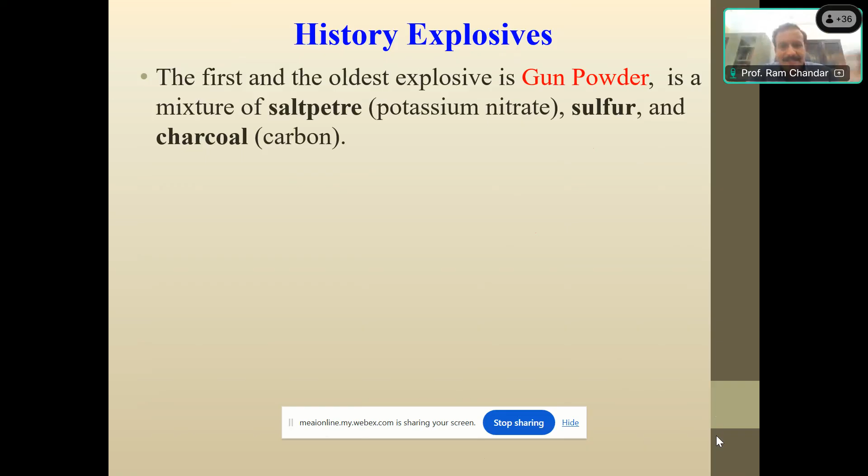Though there are so many other alternatives that have come, their productivity is very low and the cost is very high. When blasting started, as you know, the oldest explosive is gunpowder, for which there is no clear historical evidence of who invented it. Some say Chinese invented it, others say Arabians invented it.

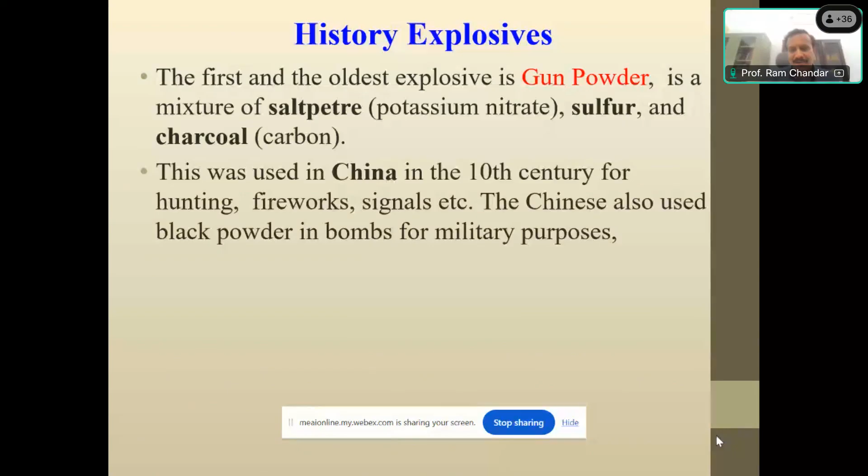But its history is almost 10 to 14 centuries old, though it was actually not invented for blasting. It was basically used in the initial days for hunting purposes. Blasting was used for the first time in the year 1627 in a Hungarian gold mine. So even if you consider the history of blasting in mines, we have roughly around 400 years of history.

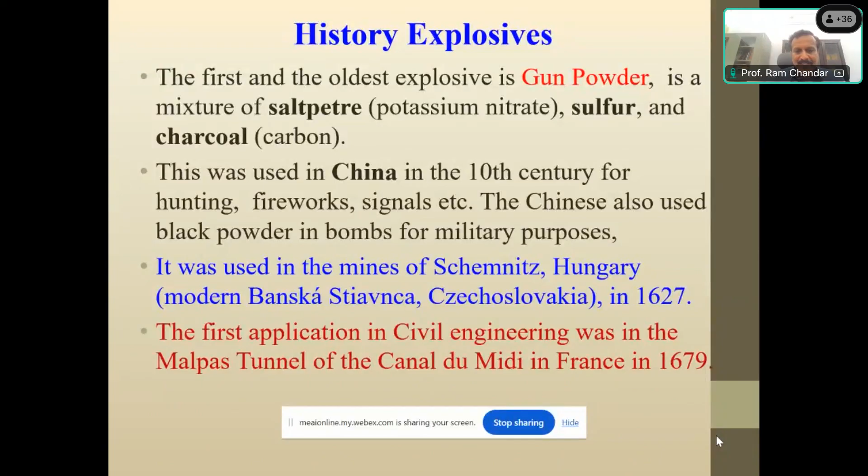And the first time it was used in a civil engineering project was in a tunnel in France in the year 1679. Though blasting is a very vast subject, I am sticking today's lecture mostly to electronic detonators. So once you have an explosive, you should have an initiating device.

Like when you are buying a candle, you must buy a matchstick or a lighter or something to initiate it to get the light, right? Similarly, when you are buying an explosive, you must have an initiating device to safely initiate it. There are historical evidences of so many initiating devices, starting from 1830 to even today, with a lot of technical advancements.

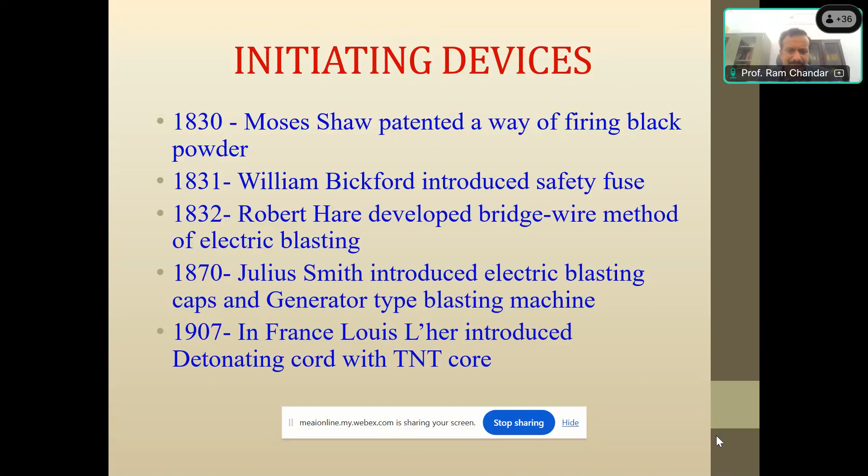In the present generation, over the last 20-30 years, what we have seen is electric detonators, including instantaneous and delay detonators, detonating cord, Nonel-based shock tube, and of late, electronic detonators.

Most of you, those at senior levels, I think you must have started your career in large scale mines using a detonating cord with a cord relay. Those who are in middle management, the younger generation, may be using Nonels. And after a few years, industry will commonly be using electronic detonators.

There were a number of patents on electronic detonators from different countries like Germany, US, Canada, and so on. But you see, though the technology was introduced in '86, we are still not able to use these electronic detonators on a large scale, even after 38 years.

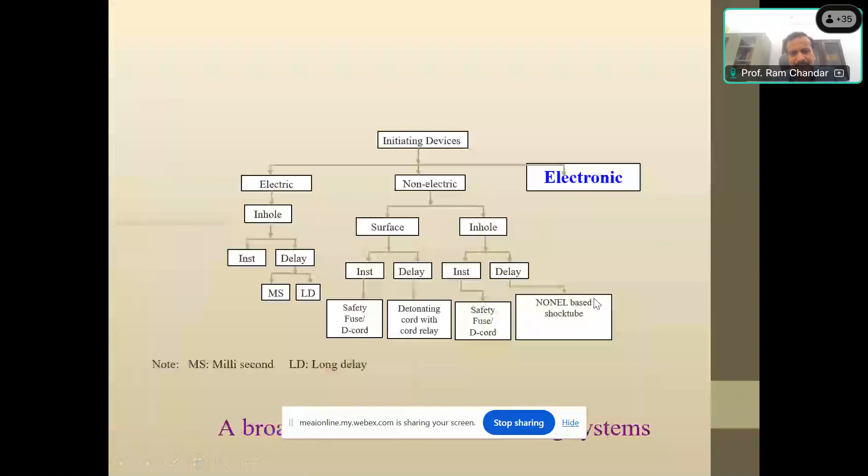So if you broadly classify, if you see any textbook, during your BTech subject in blasting or rock fragmentation engineering, initiation devices, only this chart will be there. The electronic detonator is not there in the old books. Now we have to add electronic detonators also, because olden days we classified into electric and non-electric.

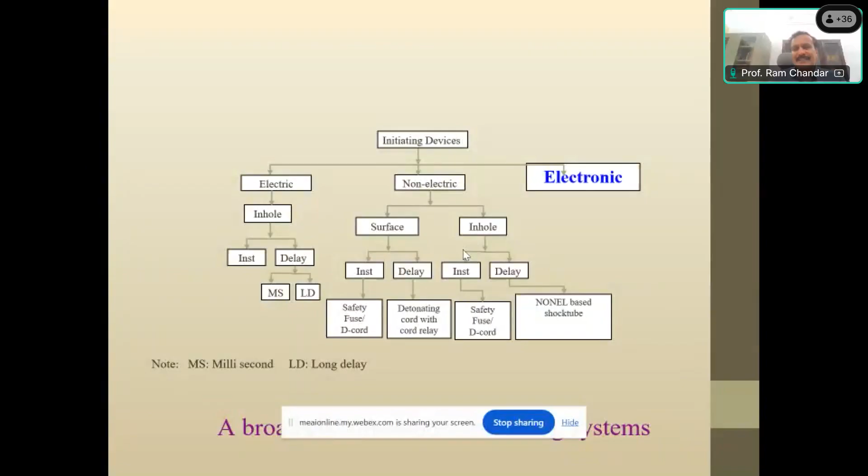It is instantaneous, but there is no point using an electronic detonator as a zero detonator. You have procured it to produce a given delay timing. If you don't give any delay timing, it goes as an instantaneous detonator, it is of no use. But all electronic detonators we are using for delay purposes only. The delay you can fix in the logger.

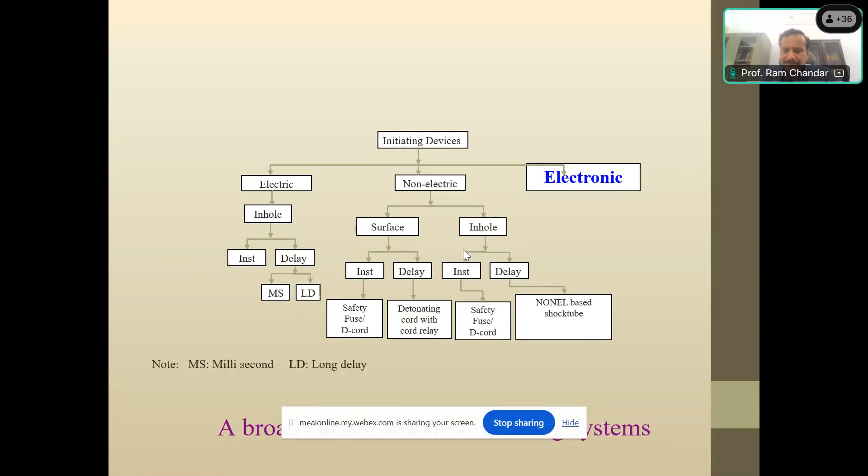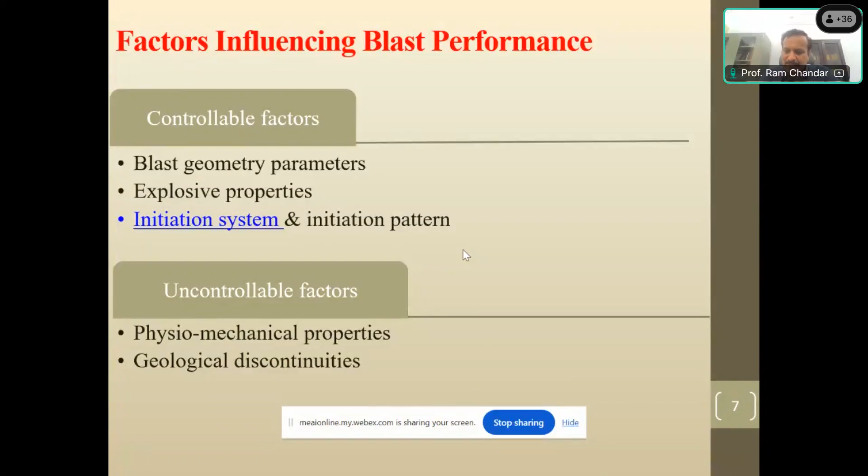Among them, now we'll stick to only the initiation system. Coming to blast geometry and explosive properties, I think other lectures may cover that. I'm not going into that part.

So what is basically the purpose of blasting? As you know, breaking the rock mass into the desired size distribution is the main purpose, with minimum side effects. What we need is fragmentation, suitable to the downstream operations. But the side effects are ground vibration, noise, and fly rock.

In fact, only 18 to 20% of the energy of explosive comes in the form of fragmentation. The remaining 78 to 80% goes in the form of unwanted effects like ground vibration, noise, and fly rock. These side effects are not only wasting our explosive energy, but also causing unwanted problems.

Because nearby villagers come and complain because of high noise levels. Actually, when noise levels are high, there is no correlation - if noise levels are high, that doesn't mean there is damage to the structure. But most of these are called socio-technical complaints. Some of you may be mines managers - nearby villagers will come and shout against the project management or against the blasting, telling that 'I am standing in my field, I could hear the sound, there is a big noise and my house is going to be damaged,' though no cracks have come.

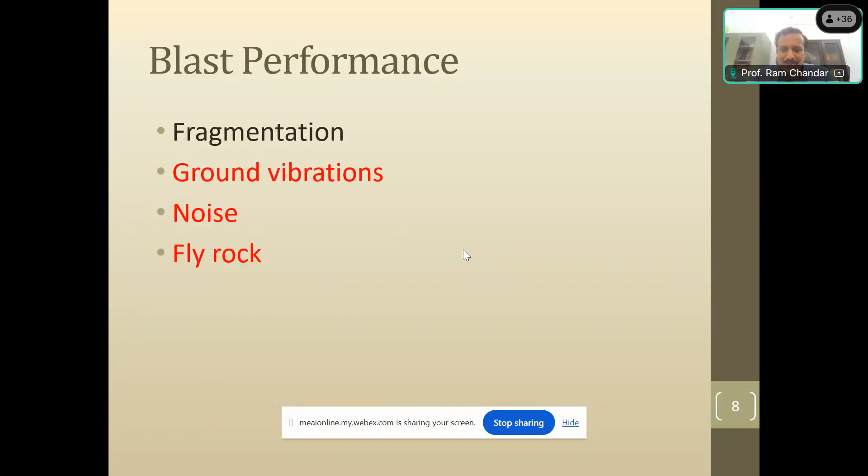But the thing is, you are the owner. If loader performance is not good, or dumper productivity is less, it is within your hands. But especially the side effects are more - the neighboring people come into the picture, into the problem, and sometimes they may halt the project itself.

I started working on the initiation system way back in 2000 when I was a student at Banaras Hindu University doing my MTech. I think I was one of the first students to work on this. My guide, Dr. T.N. Singh, present Director at IIT Patna, told me non-electric initiation systems were being introduced in the Indian market, and I could start my MTech project on that.

In 2001, as a student, my first two publications were made. Later, when I joined NIT Surathkal as a faculty member, I continued my research on initiation systems - these are just a few of the publications I have given. There are a number of publications under my name, especially on initiation systems, which are available free online.

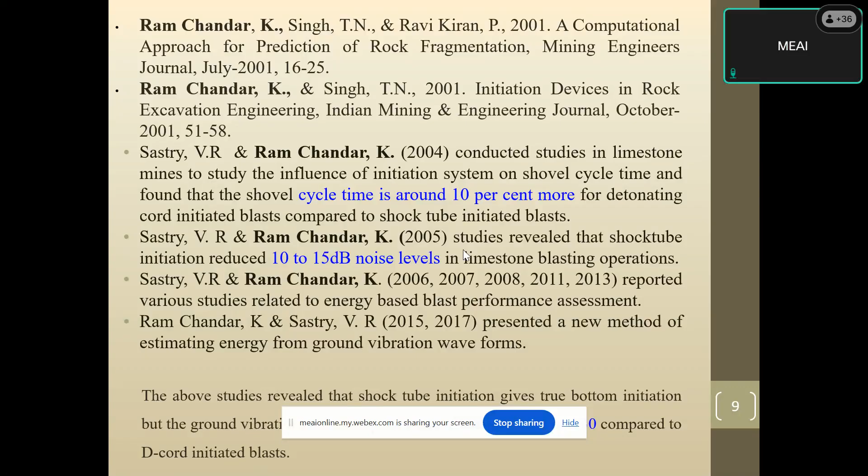We did comparative studies between non-el based shock tube initiation and detonating cord initiation in terms of ground vibration, noise levels, and fragmentation using different methods. There are various studies done by us in limestone, coal, dolomite, and different formations. Other researchers have also studied this in detail.

There is a clear-cut difference - the noise levels are less with non-el initiation system compared to detonating cord, around 10 to 15 decibels. There is a very clear conclusion on this, because there are 10 grams of PETN in the detonating cord, whereas in shock tube only 20 milligrams of PETN is there. PETN is mainly responsible for noise levels - more grammage of PETN leads to higher noise levels.

That's why detonating cord always produces higher noise levels. A reduction of 10 to 15 decibels is a very good indication. Fragmentation is also always better with non-el based shock tube initiation, because of true bottom initiation. The cycle time of the shovel is 10% better than with detonating cord initiation blasts.

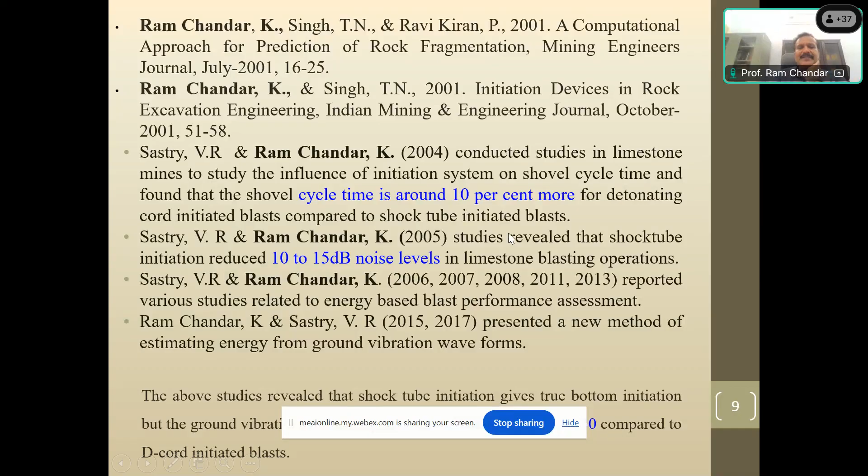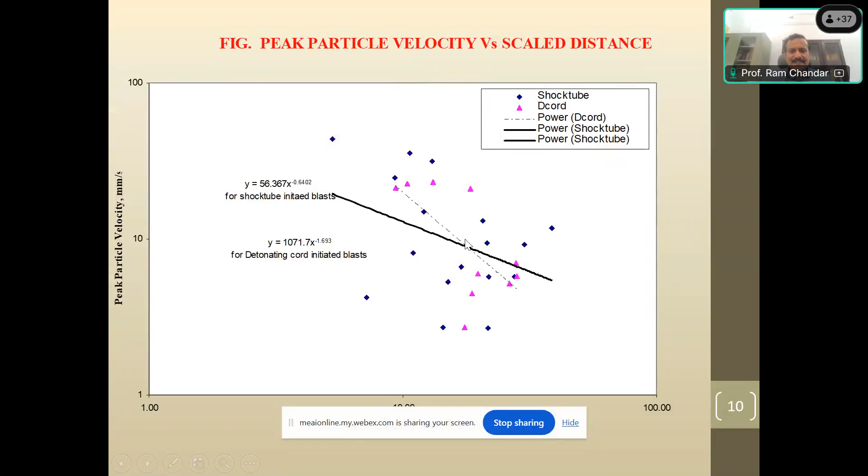But when you compare ground vibrations, there is no clear-cut clarity. Detonating cord gives higher vibration levels only up to a scale distance of around 20. Hope you know what scale distance is - it is distance divided by the square root of maximum charge per delay.

The two parameters are merged into a single parameter called scale distance. This paper was published around 2005 or 2006. At that time, we were not exactly clear why this was happening.

One of the reasons could be that in shock tube initiation, the delay timings used

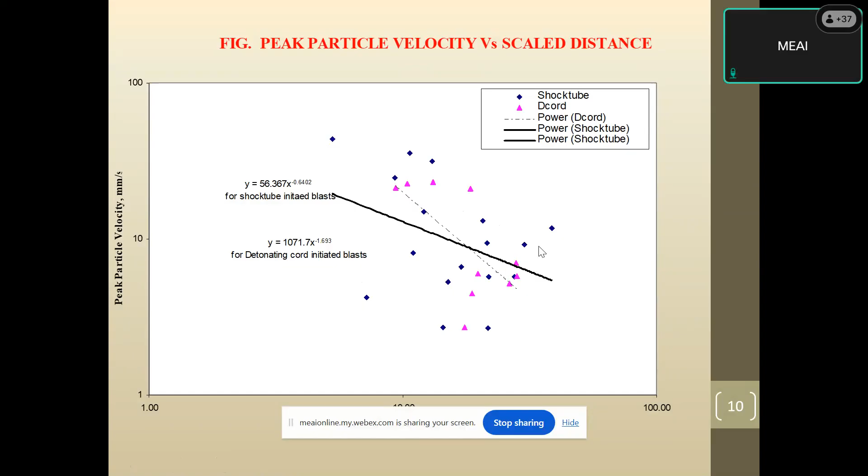Whereas in detonating cord initiation, it is based on the cord relay - it could be 25 or 50 milliseconds and so on.

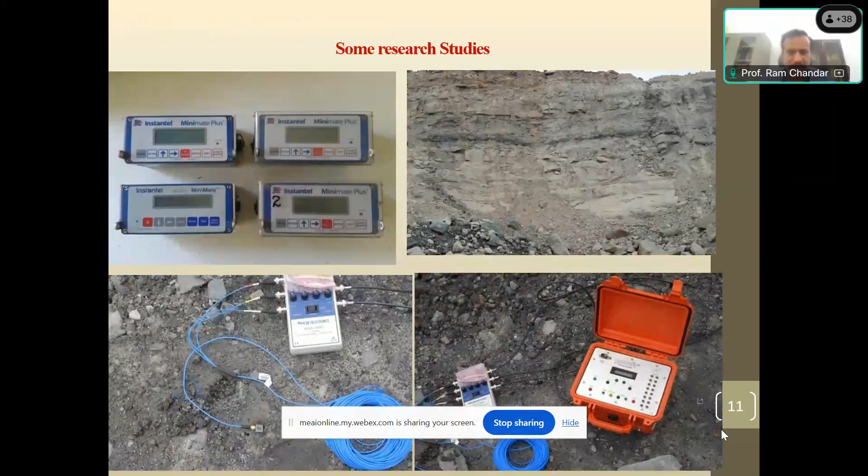Now, sir? Yes, now visible. Yeah. Where we missed, I don't know. This you have seen? Yes, sir, visible. Yeah, you are here.

Okay. So here you can see these are some of the recordings we have made from the field. Based on your delay timing, the sequence initiation should take place. Now, in this you can see 4 holes got initiated here, 2 holes got initiated here, but this is getting late. This particular hole is not going as per the given timing.

And in the subsequent second row, the first hole is just initiating now, but the second hole has already initiated. It takes a lot of time for me to explain each and every layout, but from this any blasting engineer can easily identify that it is not blasting as per the sequence given by you.

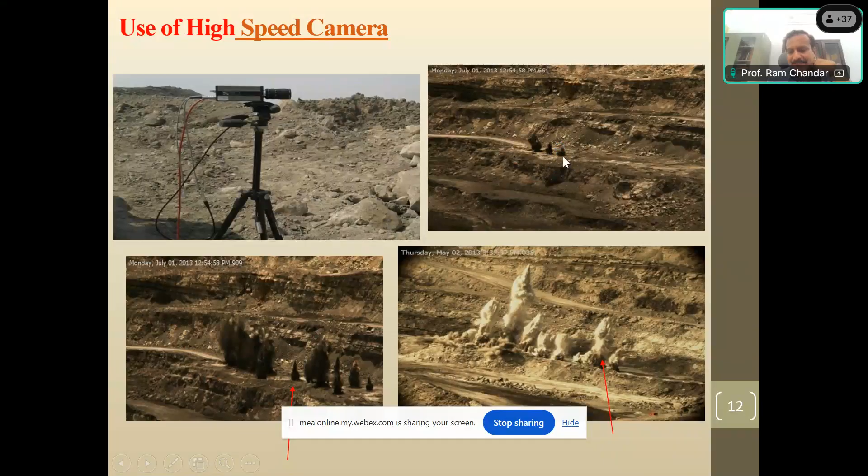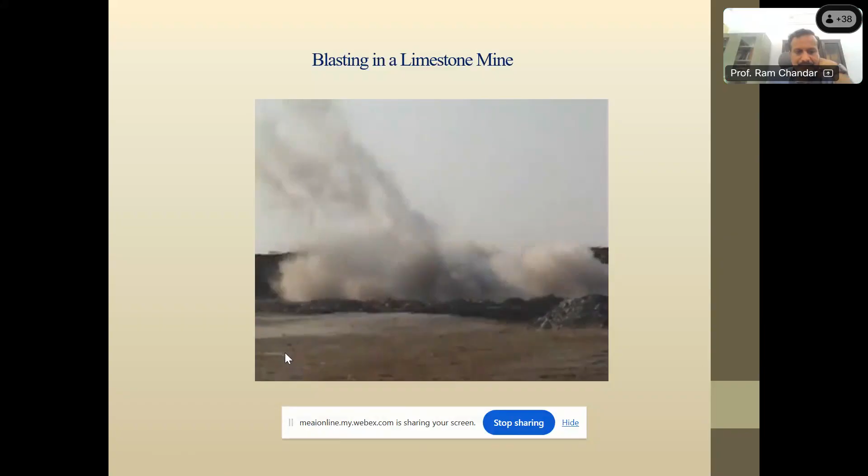Now in this case also, these two are going at the same timing, this is going at a different timing. But in the non-electric initiation, we have not given any 2 holes the same timing, yet these two are going at the same timing. So there is something wrong in our initiation sequence. Okay, fine. Yes.

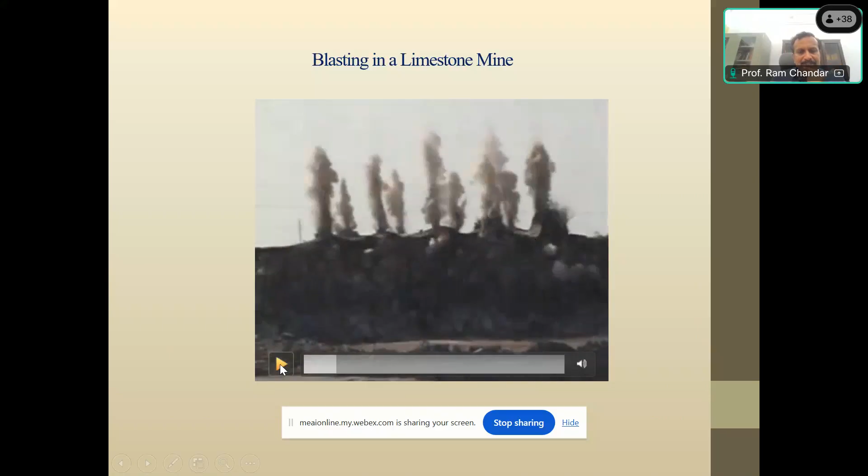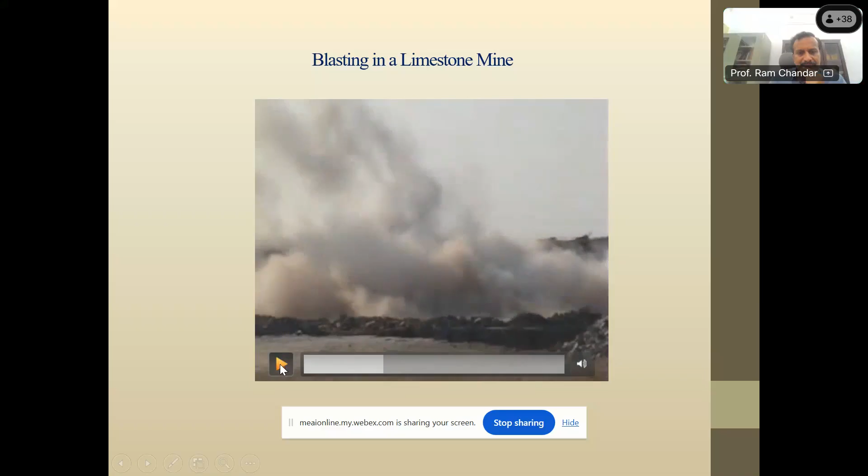You can put the layout in front of you and see which one you have given 0, whether it is going as per the layout or not. Now just observe this video. You can see this video. Hope you are able to differentiate.

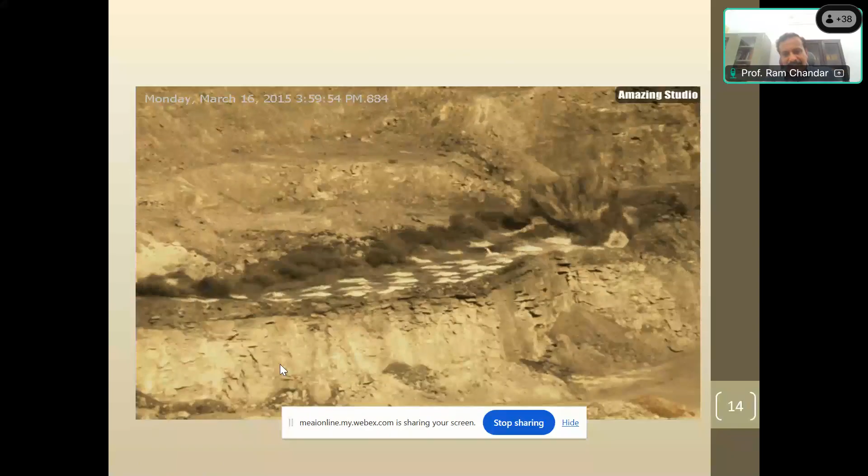Most of you must have seen real blasting at the site. Nothing will go so slow, right? Can you see it similarly from the viewpoint, standing in the viewpoint?

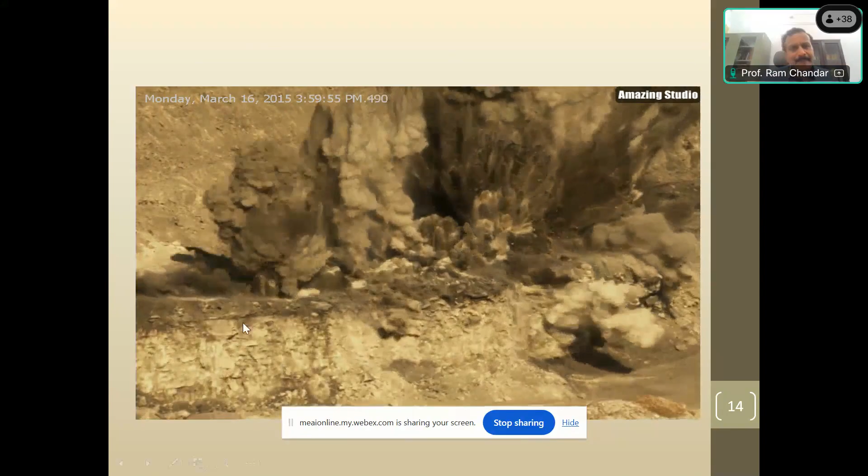Hope you are following my lecture. Yes, sir. I'm also following you. Don't worry. I'm also following, I said.

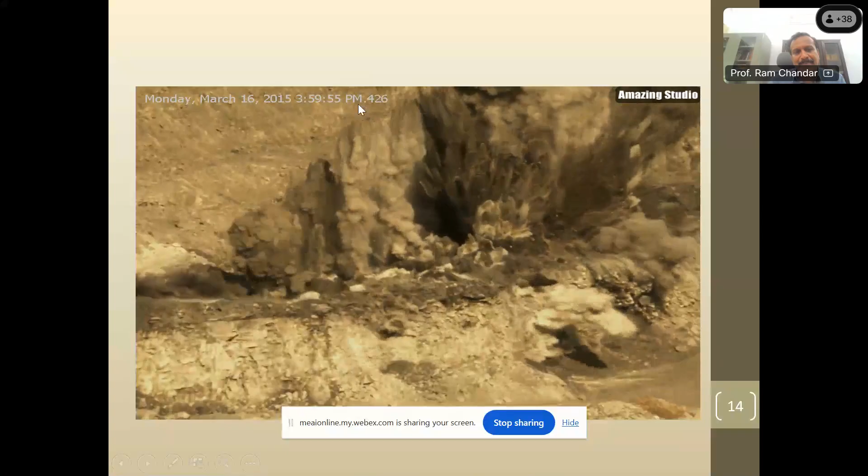Okay. See, one number is changing here, near my cursor. Actually, this video is recorded with a high-speed camera, the previous one with a normal camera. We recorded at a certain frame rate; this was recorded at around 500 frames per second. That's why it is playing automatically in slow motion.

So you can see now this hole has gone first before this one. So now you can keep the layout and your original delay timing, and starting from 0, you can calculate from the software at what timing it got blasted. There is no exact correlation between the theoretical design we have given and the time it practically blasted. From this you can also analyze further.

See, there is some horizontal movement from here. And some of the holes are just blowing out. Maybe the stemming is not proper. See this particular hole, or sometimes the burden may be more, so it is not able to move the rock mass. You can analyze from multiple angles. What is burning on the surface is a detonating cord we have given only for initiation purposes.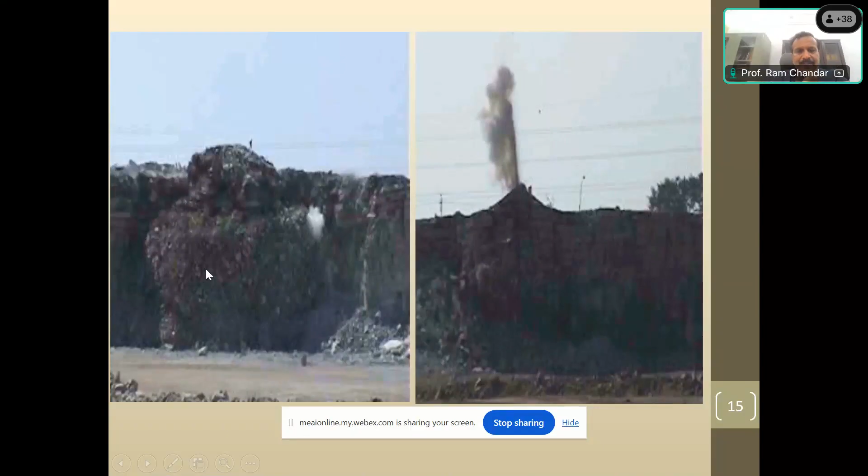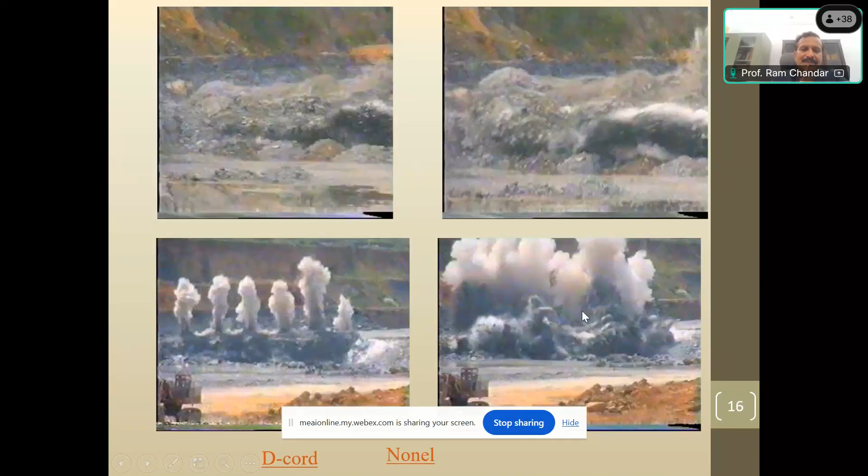Now it is a multi-hole blast. You can see the top are initiated with the shock tube initiation, bottom are initiated with the detonating cord initiation. Now, still why is this error there in the performance of the blast? So what we have done, as I explained earlier, what is the error? So we calculated what error is taking place.

See, in this row, you can see many holes are having 60 to 80% of error. At least 40 to 60% of the error is there. Suppose the hole should blast at 25 milliseconds. Either it is blasting after 25 milliseconds or it is blasting much before 25 milliseconds. So with zero error, only 1 or 2 are there. Less than 20% is 1. Surface error, it is 1. But mostly it is 20 to 40, mostly 40 to 80. There are some evidences where the error is more than 100%. Means which is supposed to blast at 50 milliseconds, it is blasting after 100 milliseconds.

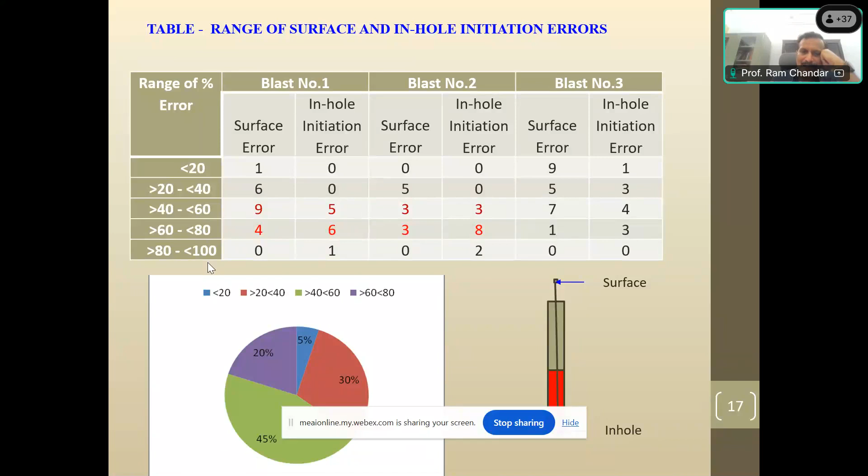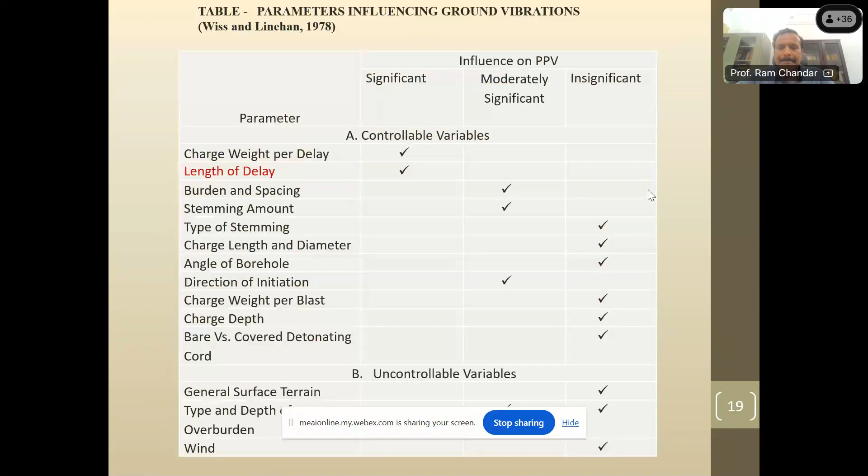So in consequence, what happens? Now you take a simple example of this. Suppose I go to a mine or a quarry and I have given a design, a simple layout I am taking: 0, 17, 34, 51. Because within the row it is 17 milliseconds, row to row 25 milliseconds. So 0, 17, 34, 51. 17 plus 25 is 42, plus again 17, 17, 17. When you do this, at least there will be 8 milliseconds. This is the standard practice what we do in case of NONEL-based shock tube initiation.

Now, based on this design, what we do, we fix the instruments at different locations and monitor the ground vibration levels. There is something called the USBM equation. You may be knowing how to predict the ground vibration levels. PPV, peak particle velocity, equal

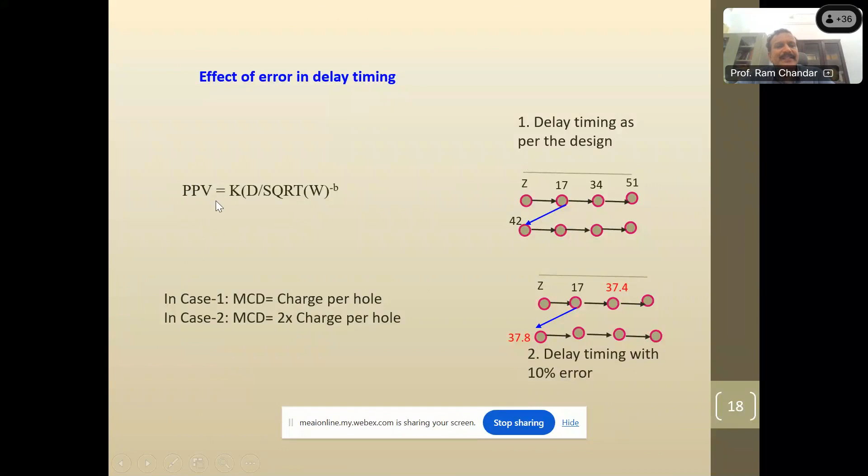Your voice is broken. The break in your voice, Professor. We can't hear the voice.

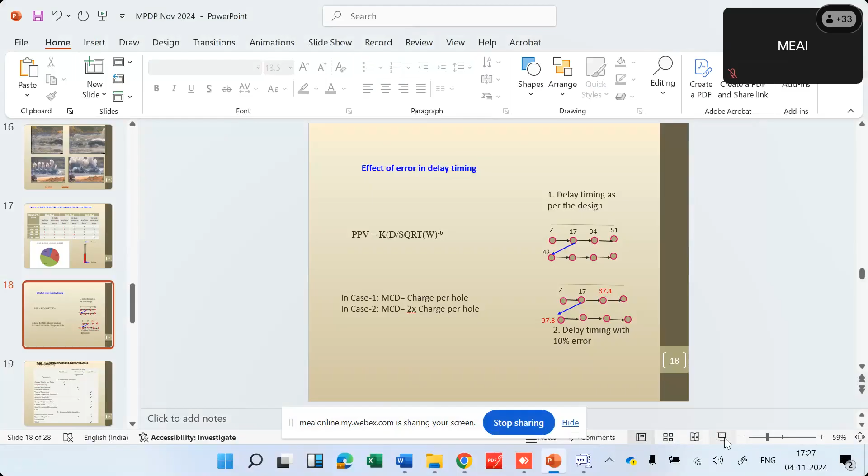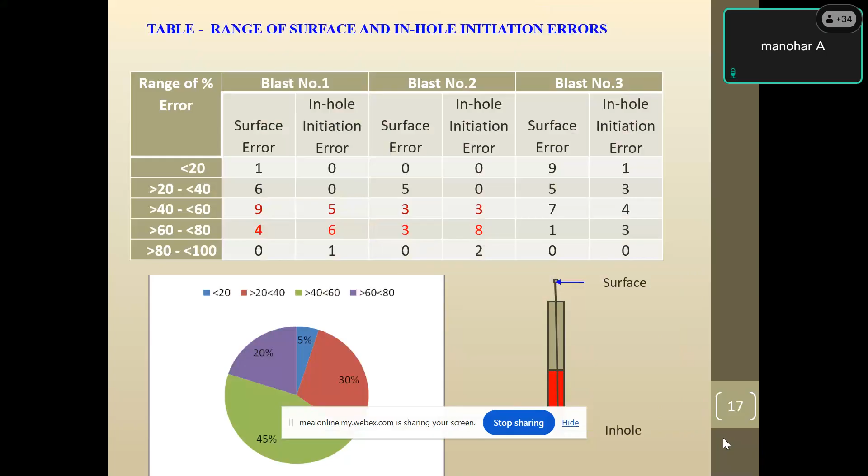Sir, there is a small technical issue with the network. Professor Ram Chandar sir informed he will be sharing the screen soon. Now, sir. Yeah, sir. Now it's visible. Please continue, now you are visible. Now it is okay, sir. Sorry. It's okay. This slide, earlier I have presented this to you. I'm not sure where we lost the connection. Sir, last slide, this slide, sir. This slide I have done, right? No, this you have explained half. You have to continue this one.

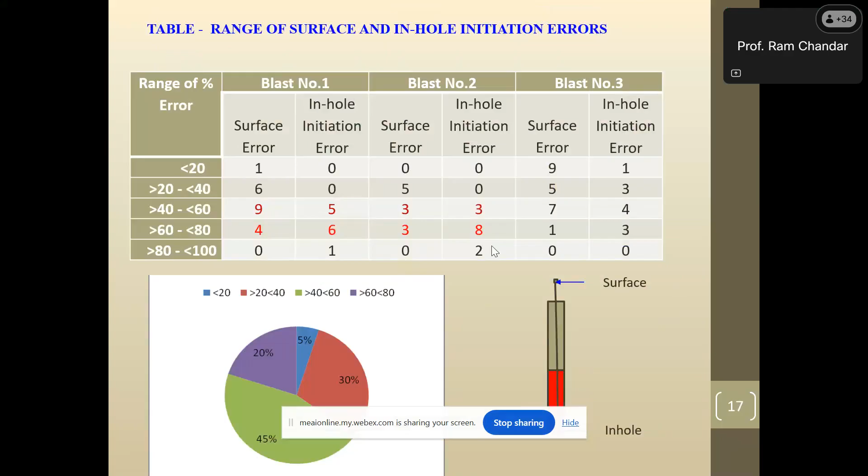Yeah, when we do this high-speed camera recording and calculate the real time as per the design and what timing it actually executed, there is a lot of error in the delay timing. There are some errors more than 100%. Means a hole should blast at 50 milliseconds, it is blasting after 100 milliseconds. So there is no mistake from the consultant or the blasting in-charge, but still the result will be different. Practically what happens? Hope this is not explained, right? Okay, anyhow, I will repeat.

A simple normal layout you take: 0, 17, 34, meaning within the row 17 milliseconds, row to row 25 milliseconds. This will be the delay timing. Simple layout I have taken. So this is the USBM equation, where K and B are the constants, distance divided by the square root of maximum charge per delay. The maximum charge per delay will be nothing but the charge per hole in this case, because each hole is supposed to blast independently based on our delay blast design.

But practically what is happening? You assume that this 34 is blasting with 10% plus error. 10% of 34 is 3.4. 3.4 plus 34 is 37.4. Right? This 42, suppose it is blasting with minus 10% error. 42 minus 4.2 is 37.8. So this 37.4 and 37.8 will both blast at the same timing, because unless there is a minimum delay of 8 milliseconds between the two holes, we cannot take them as a separate initiation. Now we assumed that as per this it will go. Suppose the charge per hole is 50 kg.

Based on substituting 50 kg, I have done the calculations and done the design. But what is happening here? This 50 and this 50, 100 kg got initiated. Suppose, as you know, circular number 7 of 1997, the DGMS guidelines for peak particle velocity, there is a structure, a house. I am supposed to have the PPV below 5 mm per second. Keeping that in view, I have given the design thinking that it will give less than 5 mm per second. But on that unfortunate day when we measured, this may give more than 5 mm per second. Why? Because this has happened.

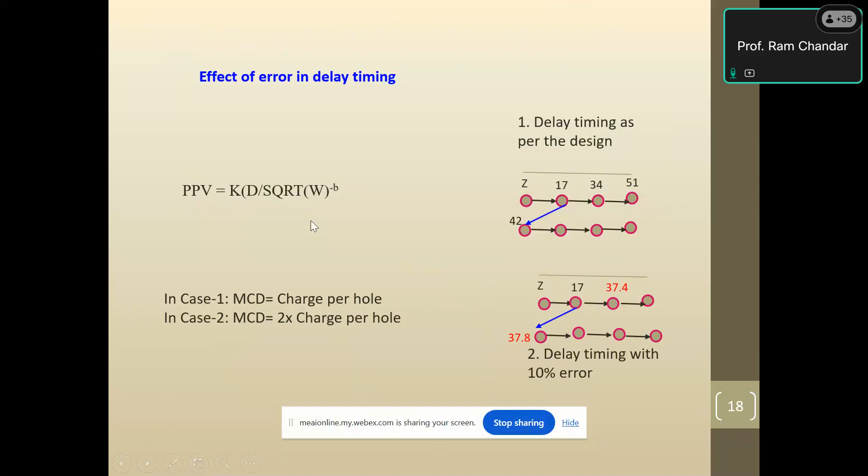Is it my mistake? It is the initiation system mistake. Means it is not blasting exactly as per the design. I assumed 50 kg and designed, but 100 kg has happened at a single point. Then the PPV may go high. Then the mine management think, we called this person thinking that he is a blasting expert. Yesterday it was less than 5. When the expert came, it is giving more than 5. Actually, it is not the mistake of the expert. So such things will happen.

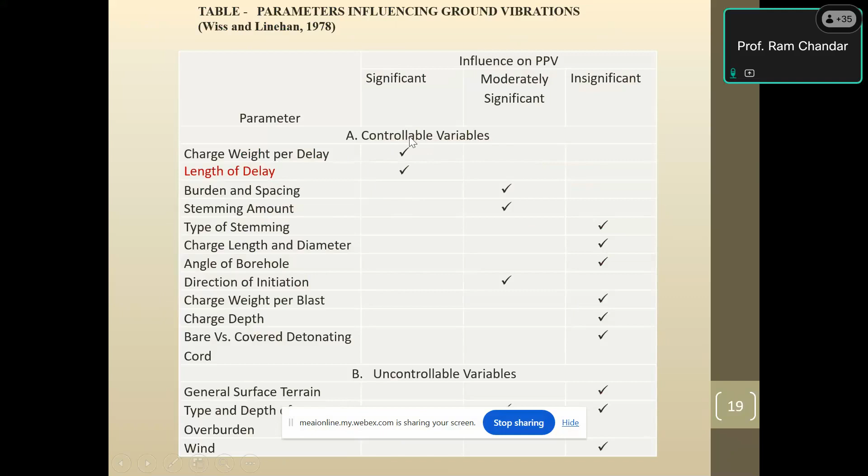Right? So among the number of parameters, especially the charge weight, the charge per delay and the length of delay are considered as the most significant parameters on PPV. Now coming to the delay timing, various researchers have given various guidelines. Even till today, there is no universally accepted delay timing. And in fact, the user has no control over the delay time.

Suppose the day you are buying a Nonel based system, either you have to buy 17, 25, 42, 65, you don't have any control at the site. Or if you buy a D-cord with a cord relay, 25, 50 or 100, once you have purchased, you have to use the same. You don't have any control. Suppose burden is changing. Yes. But based on various theoretical studies and even some pilot scale studies, various researchers have proposed these equations.

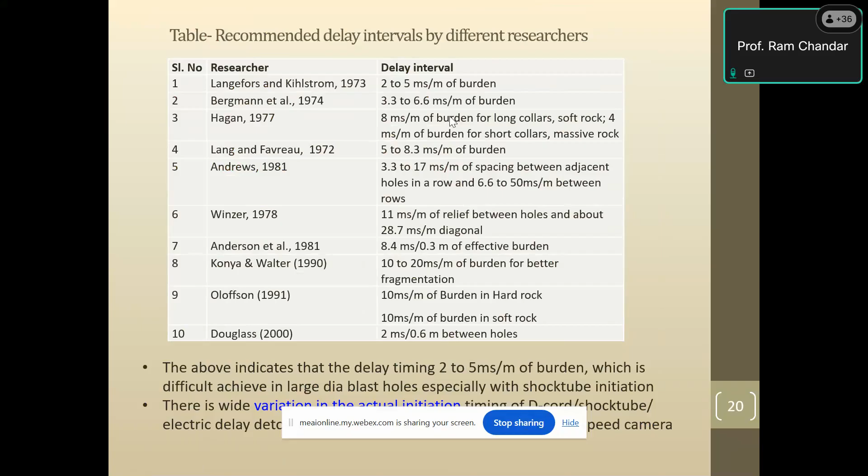There is a technological difference, because in the previous initiation systems, I'm not blaming, I'm not sure if in the audience any explosive manufacturers or initiation system manufacturers are there. There is nothing to defend here. The simple logic is the previous initiation systems, whether you take a D-cord or shock tube or cord relay or delay detonators, there is a delay element which is mostly a chemical. So the length of delay is defined based on the length of the delay element. Means the time required to blast is decided by the delay length.

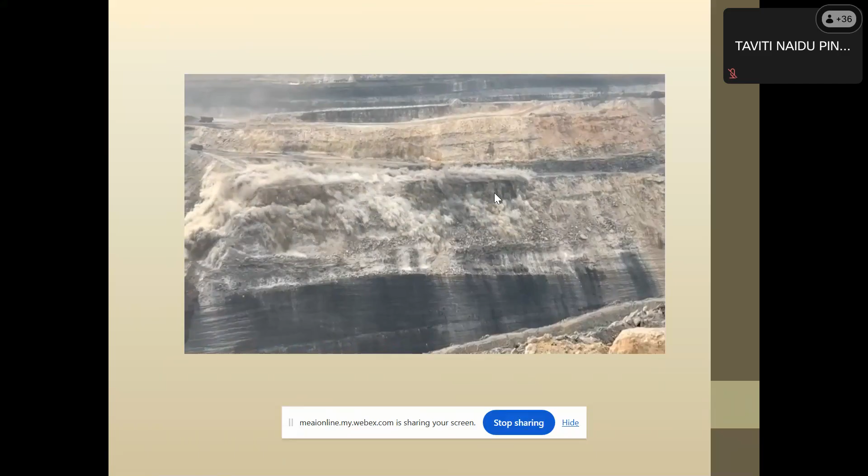Sir, your audio is not audible, sir. Ramchandra, sir. Sir, there is no audio, video.